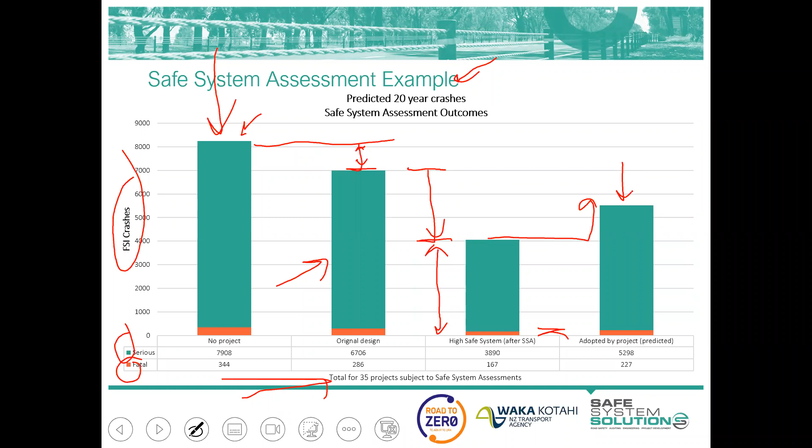And I'll just check with Kez if I've missed any questions in the chats. No, there was just a comment about considering environmental conditions from John. Yeah, absolutely.

All right, I'm starting to see some excellent suggestions coming through. First one being, yeah, construction costs.

So a safe system assessor, when providing recommendations, is not constrained by budget. So if you recommend things like grade separation or providing a pedestrian overpass or building a roundabout to improve safety, those are all valid treatments to be recommending within a safe system assessment report.

You do want to make sure you're providing recommendations that are justifiable or feasible, but it's very common to include these as recommendations, and then the project team considers them unfeasible due to costs. It's a very, very common one.

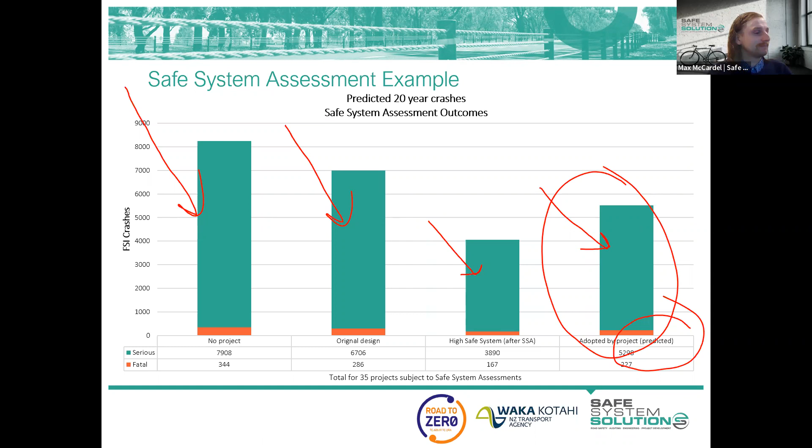It's a way that we actually compare a project versus the existing conditions, and also existing conditions versus lots of different project options. So you could be looking at a particular intersection, and maybe you're thinking about signalizing it, and maybe you're thinking about producing a roundabout. So a safe system assessment would be an excellent tool in that instance to gauge safe system alignment within all of those cases, against the existing case, against the signalized case, against the roundabout case. So it's a really, really good tool when you are looking at different options and trying to gauge what is a preferred option in terms of road safety.

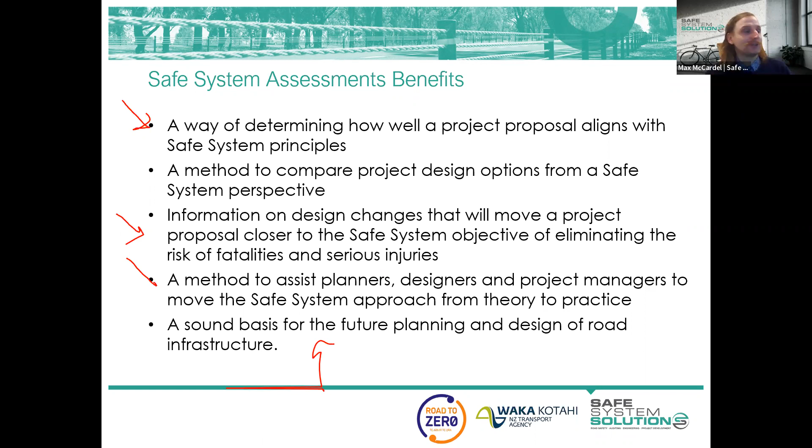Concept, draft level - functional designs, preliminary designs, concept plans, even where you've got no drawings really produced yet - an SSA is a really good tool to be using. If you've got just a line on the map which shows connection between two towns and that's all you've got to work with, an SSA could be used in that instance. The reason for this is because SSAs are much more focused on implementing, I suppose, quite broader project changes - things changing with the configuration of the design. So it's a much larger ability to influence the other aspects of the design, such as detailed build.

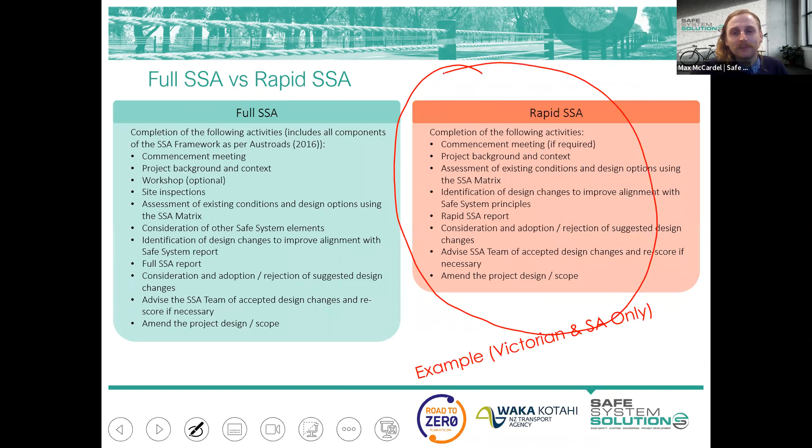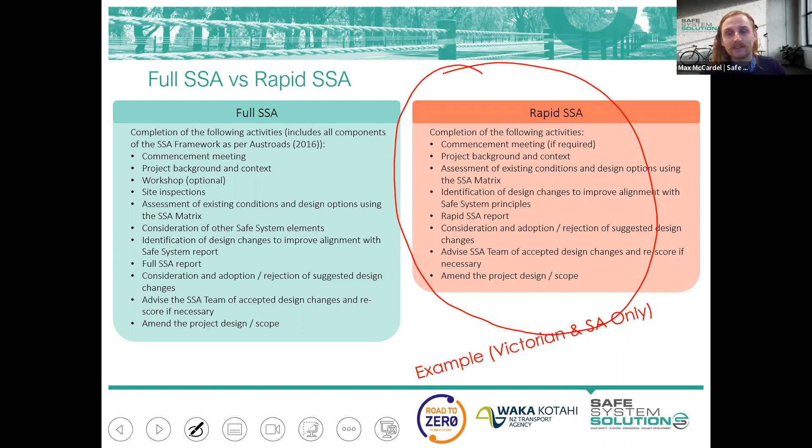This one's only for Victoria and South Australia, so I'm not going to spend a lot of time on it, but that's where I was talking about the rapid and the full. Basically we'd do a rapid if the project's expected cost was under 2 million. Above that we're probably looking at a full rather than rapid SSA, and the difference between the two is things like site inspections - you may not necessarily do those within the rapid. You may not necessarily cover all the other prompts associated with the other safe system pillars within a rapid SSA, so it's just focused on the infrastructure. I'm not going to spend a lot of time on that because I recognize people here may not benefit from it.

I'm going to chat now about different safe system road environments. We've already done some work on this in previous modules. The reason we've included it here as well is because the SSA assignment you've got is one example of one road environment, but as we know there's a raft of different options where an SSA could be conducted. So we just want to make sure you feel comfortable acknowledging what the safety risks are within these different environments - just a selection of things you'd be looking out for if you were conducting an SSA within these environments.

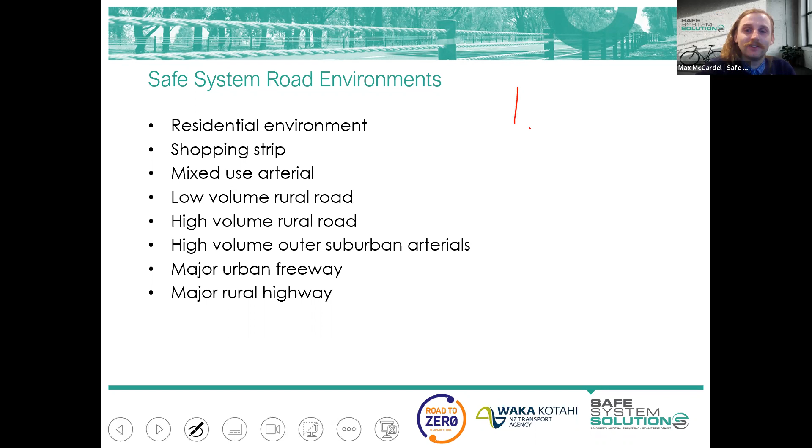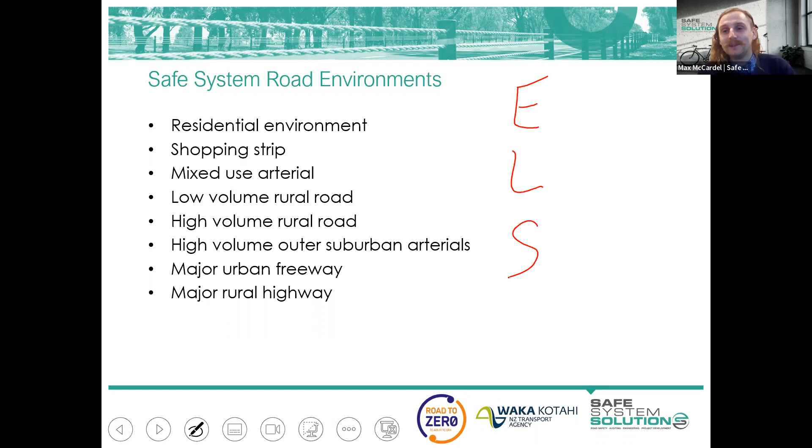So an opportunity again to jot down in the chat different risk factors, and we'll do that little activity again where we pop down whether those particular factors would influence exposure, likelihood, or severity, just to make sure that idea is really cemented within everyone's head. We'll get started with the first one being a residential environment. If you were to assess this existing conditions, what types of things do you think would influence your exposure, likelihood, and severity within this environment? Give you a moment to pop that down.

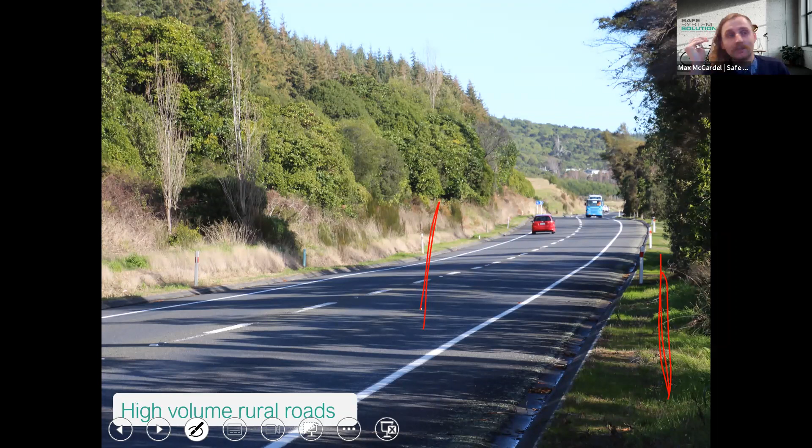High volume rural roads - these are probably the more likely ones to expect infrastructure upgrades. So as I mentioned before, edge barrier in the middle as well. You could look at audio tactile line marking, raised reflective pavement markers, all those types of things to reduce the risk of crashes.

Thinking about intersections now, if you've got a high volume road, which I'm going to say is this north-south one, and a low volume road, how do we manage risk at these locations? New Zealand has done awesome work within the RIAWS space.

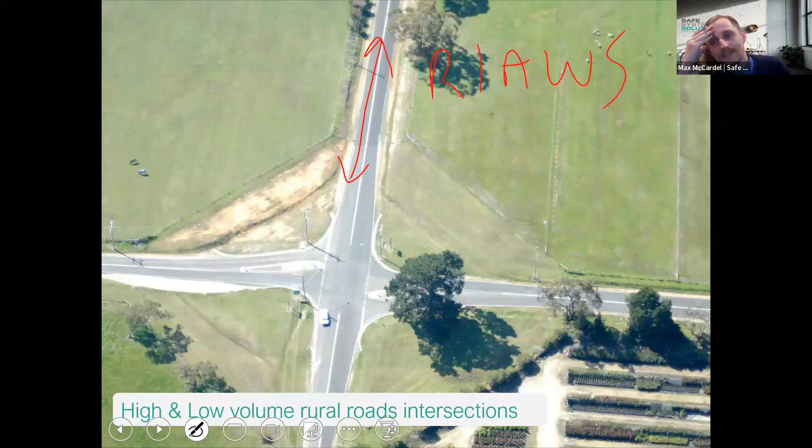Basically, if there was a vehicle approaching on the minor leg, then the major leg slows down. There's a vehicle activated sign, so instead of going 100, you're going 70 now, or whatever it is - just acknowledging that there is a crash risk at this location, so let's try and bring speeds down. That's a really, really cool treatment, and something that can be certainly recommended as part of safe system audits.

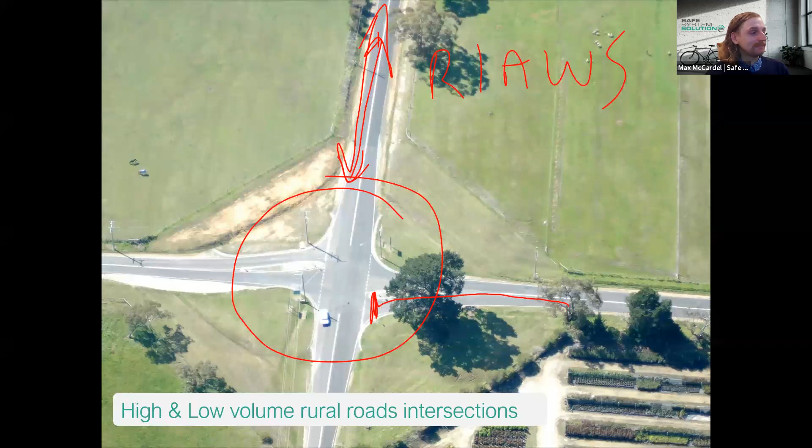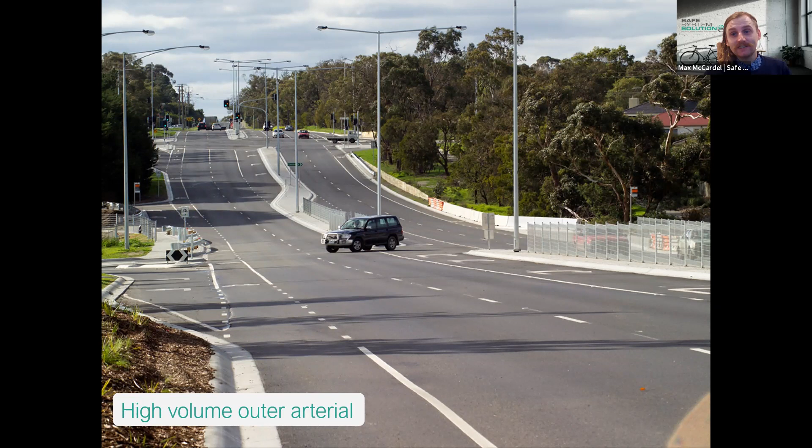High volume arterial roads, generally quite constrained sites, very difficult to be able to build bigger things like roundabouts and the like.

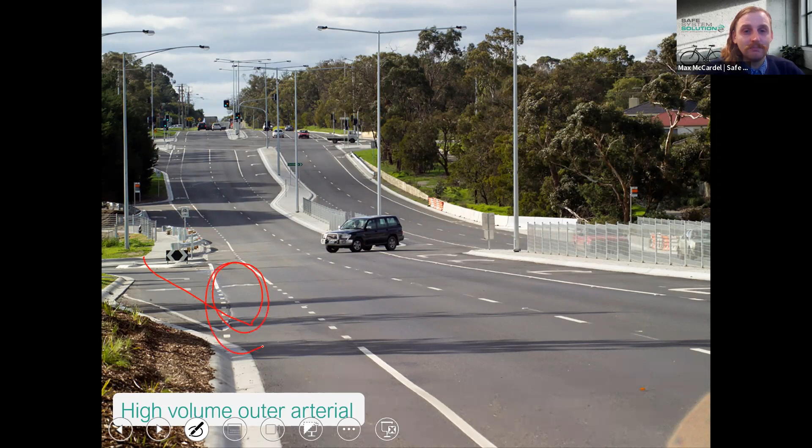Something that catches my eye immediately is having an on-road bicycle lane in an environment which I believe is 80 kilometers per hour. That does not align very well with safe system principles. So that's something we could be looking to recommend as part of a safe system audit, trying to bring that off-road or provide protection for cyclists.

Difficult environments though. You can even see we've got pedestrian fencing, which we've talked about before, trying to not encourage pedestrians crossing over this busy road environment. But acknowledge that can only get you so far.

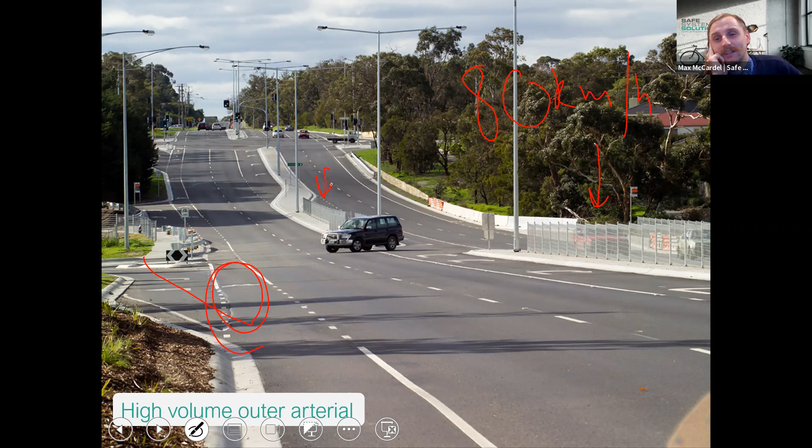As we see here, we've got a bus stop on that side, a bus stop on that side. It's likely people will want to be crossing within this area. So what could we be recommending as auditors? We could say we need to move bus stops closer to the signalized crossing point, so at least pedestrians have those facilities to cross with phasing.

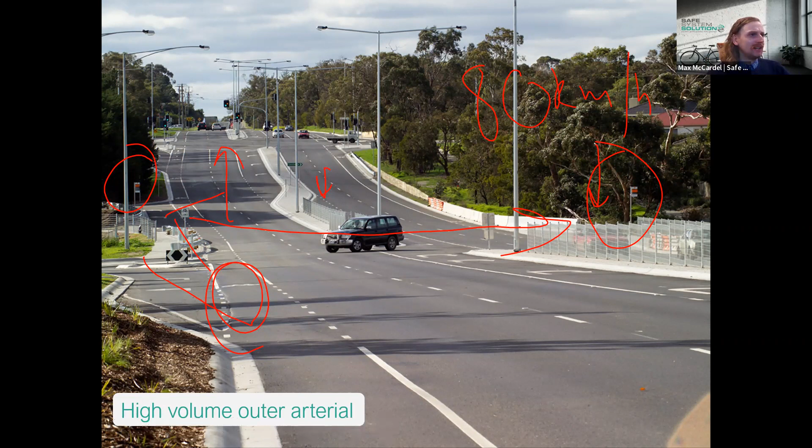Just things to be watching out for. I've only got a few more slides and then I'll show you the template that I've been talking about. Major freeways.

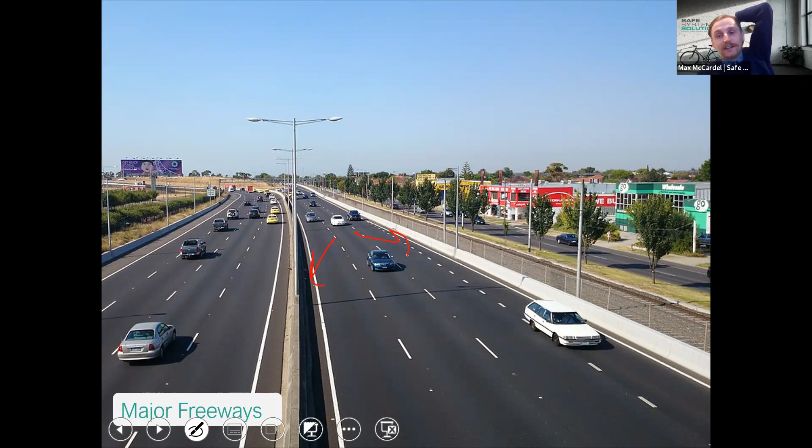This is another example of where your prompts into post-crash care may be particularly relevant. Thinking about if there was an accident to occur here, how could emergency services attend the site, particularly where there's no shoulder for an ambulance to be driving on to access the site. So that should be ringing alarm bells for auditors. That can definitely impact the level of severity if they're unable to attend the site in a timely manner.

This is how major rural highways have been constructed in decades past, having this very, very wide median in the middle, and just assuming that's enough to reduce the risk of head-on crash. We know now that it doesn't.

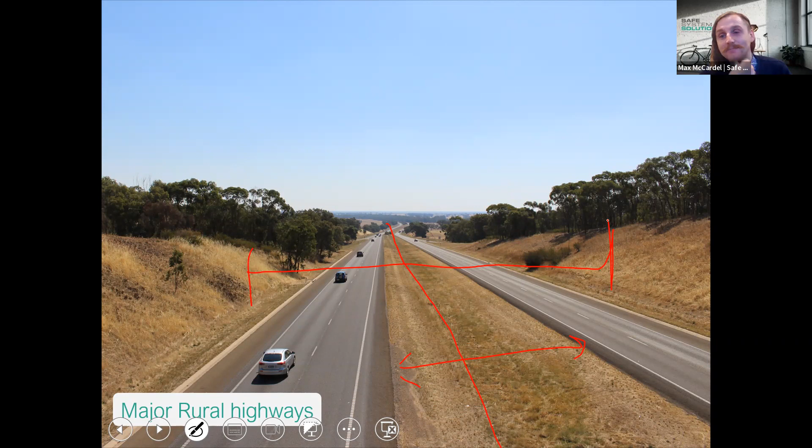Instead, it'd be much more likely to see this narrowed up with just a central median barrier installed, so there's good outcomes there. That's an example of where you may actually get cost savings. This type of footprint obviously requires a lot of earthworks and environmental impacts, you may be cutting down trees and the like. Whereas if you're able to make that narrower, less construction costs. So it's just an example where an SSA may be able to save the project money.

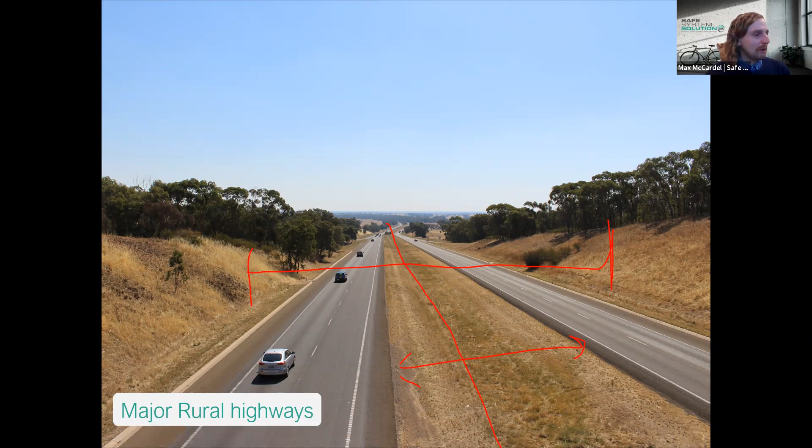I think I've got one more slide here. Yeah, rural intersections. Little bit difficult to see here. This is a very busy rural highway, which would connect major townships and the like. And how do we manage intersections that are not grade separated? They don't have those acceleration lanes and things like that, so it could just be a minor one.

First thing you could do, I'll try and draw this out. I'm not overly confident this will work, but let's give it a go. So I've got my local road kind of running left, right there, and then this major highway, and that's like the median in the middle there.

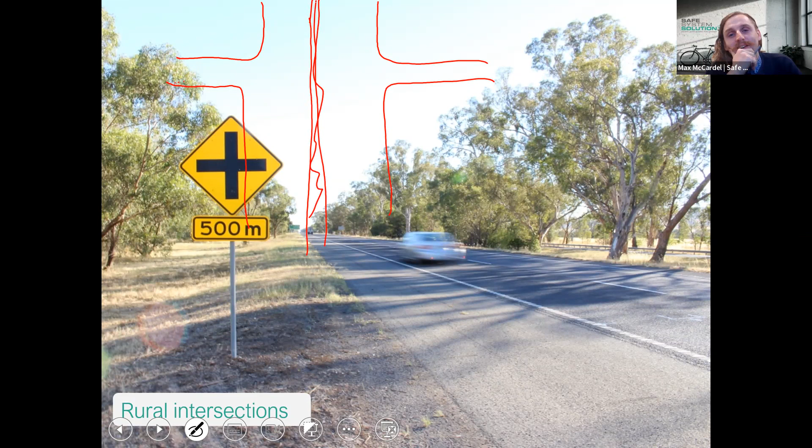The first thing we could be recommending as auditors is let's not enable straight through crossing here, because a vehicle that has to stop and wait, give way to everyone there, then stop in the middle and give way to everyone there again - just the speeds we're talking here, it's really not an appropriate treatment to be recommending.

So you've got to then think about, well, how can we manage that? Because presumably there is a desire for vehicles to maintain that movement. Just get rid of all those.

So one way we could look to still maintain that is provide an acceleration lane, so you'd be able to get up to speed the vehicles exiting there, turning left out of there. At some point further down, they'd have the ability to cross over to the lanes and perform a U-turn, and similarly decelerate and enter this road here.

So although it may be more circuitous for the driver, which it certainly would be, what you've done instead is try to bring vehicle speeds to relatively the same level where there is the conflict. So you've got this acceleration to make sure if there was a crash occurring at that conflict point, speeds are relatively the same. And also the angle of the crash is much more forgiving because you'd have an angle that looks more like that, and so it's referred to as the change of velocity - the change of speed there is much decreased.

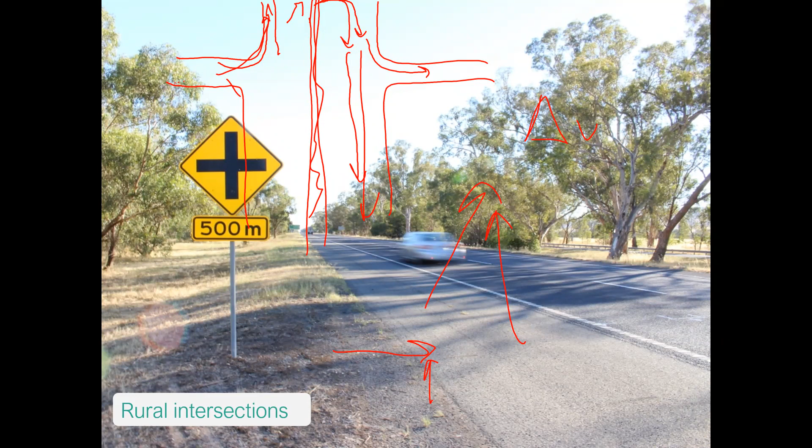Yep, so just managing speed on approach to the conflict point. Sorry Max, that's the only question outstanding.

Fabulous, okay. So as you can still see, I've just brought up a web page there. Kez, can you see that? Yes, I've got that. Excellent, okay.

So this is the Safe System Audit Guidelines document that I've been referring to in today's module. At the bottom, it was published in October 2022, so it's still relatively fresh. At the bottom of it, you can download the guidelines and download the template.

What's really exciting is there's an exemption form - I'll touch on that in a second, but this is the template I've been referring to throughout today. It gives you all the headings required to complete your Safe System audit, so there's no guesswork as to what you should be including.

It's got all the Safe System audit procedure, things we've been talking about today. The Safe System Assessment Matrix is in there, all the prompts I've been talking about are in there as well. So I'm just going to skip through this because it's what we have been talking about. Here's just an example of one of the prompts.

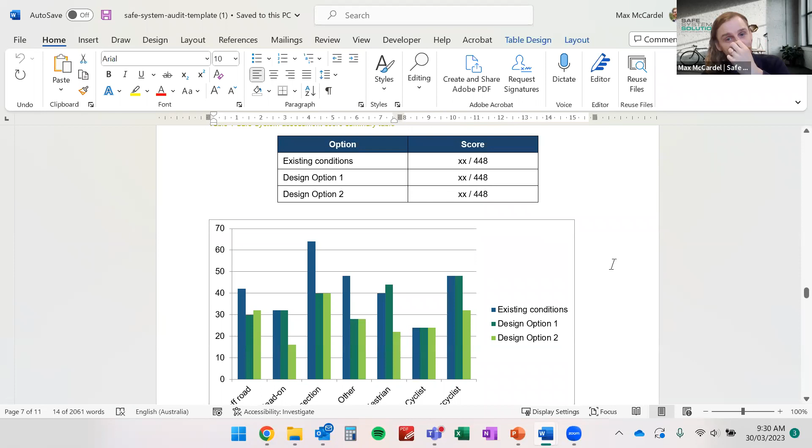What are the road users' presence? That's another example. What is the vehicle composition? Another example of the prompt. That's the SSA components we've been talking about, where you've got the matrix and the scoring system.

This safety concern, this is more the road safety audit component - that's what I'm saying was previously separated. You had these two different documents, and within this template, they're put together.

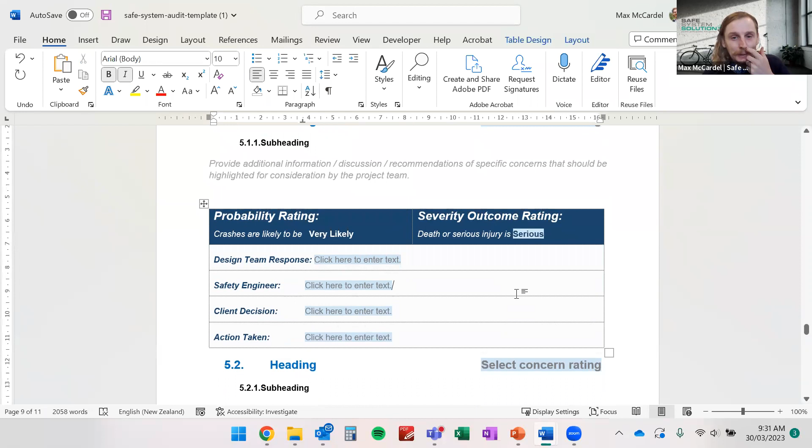So there's also, it's just referred to as safety concerns, but you've got the ability to select a probability, select a severity rating, and you'll be able to produce an overall crash risk for this particular case. The way that is defined is earlier on in the document, in Figure 1.

So this diagram here - I can't remember which two values I've selected, but say if it was likely and serious, then it's considered a serious crash safety concern. Hopefully that makes a bit more sense why I was saying previously they were two separate documents, but now they've brought both methodologies into one.

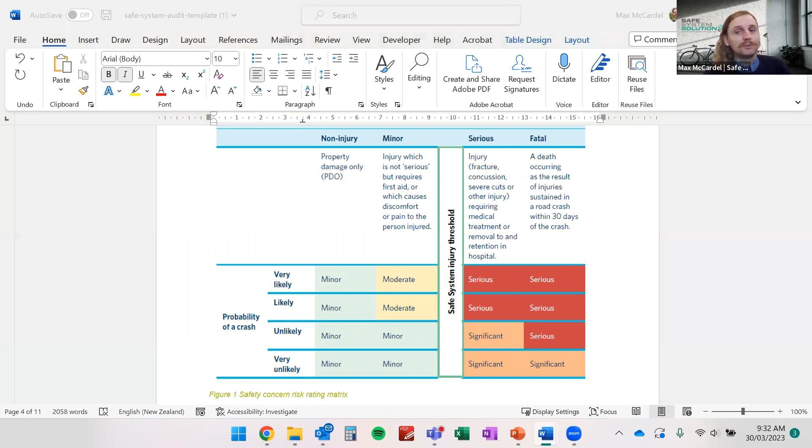The other really cool thing is this Safe System Audit Exemption Form. This is where a road controlling authority would need to say exactly why they don't believe a safe system audit is required on their projects. This is amazing accountability - I can't say I've seen this at all in other jurisdictions. Basically someone within the RCA would need to sign off and say they consider that the project will not have an adverse effect on the safety of road users, which is an incredible statement to make.

I wouldn't be signing that anytime soon, personally. I think any project anywhere could have an adverse impact on safety, just depending on how you look at it. So it's interesting to see how many exemption forms will actually be submitted to RCAs - I imagine people would be quite hesitant to sign off on that. But there you go, what a process. Go NZ.

The last one I wanted to just bring to your attention as well - I mentioned in module 3 that we've developed those safe system assessment fact sheets, which are like common questions that come up as part of doing a safe system assessment.

There's also this one, the safe system assessment audit guidelines that NZ released earlier this year in January, stipulating the process and frequently asked questions, and acknowledging that Waka Kotahi has not used the Austroads Road Safety Audit Guide. They have created their own blend.

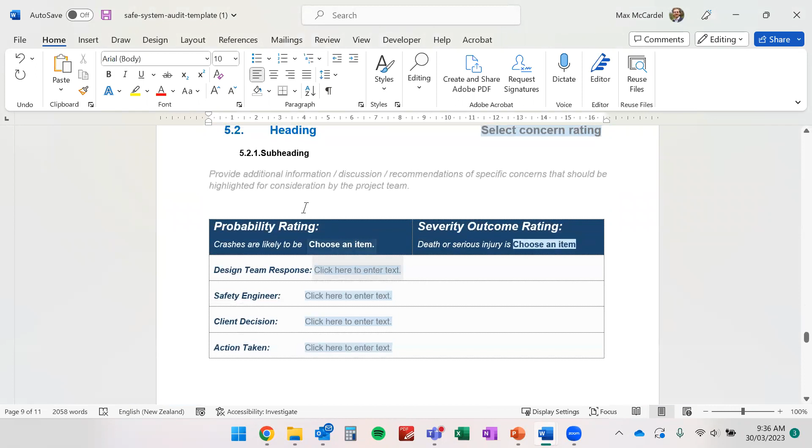Just about that, I think we should address why section 5 of the template omits a recommendation section. It should provide additional discussions, recommendations of specific concerns.

So the design team response, the safety engineer - this is where you have an opportunity to pop in your recommendations. That's where I'd be putting it in there. It looks a little different depending on different jurisdictions, so you could also pop some in here as well. But under each risk that you identify as part of the project, you can also pop in a risk recommendation as well.

Yeah. Good question. I was going to mention completion of this course now.

So on the LMS, once you have completed all your modules and your safe system assessment assignments - there's a quiz after today as well - you scroll right down to the bottom where there's feedback and certificates. We require the course feedback to be completed, that's one of the other things that must be done to achieve your certificate.

The reason is we really want to make sure we're providing the best courses possible, and we encourage honest feedback. So anything you found challenging or not articulated well, we want to know, because we want to make sure we're continually improving these courses. It shouldn't take long though, it's not an onerous feedback form or anything like that.